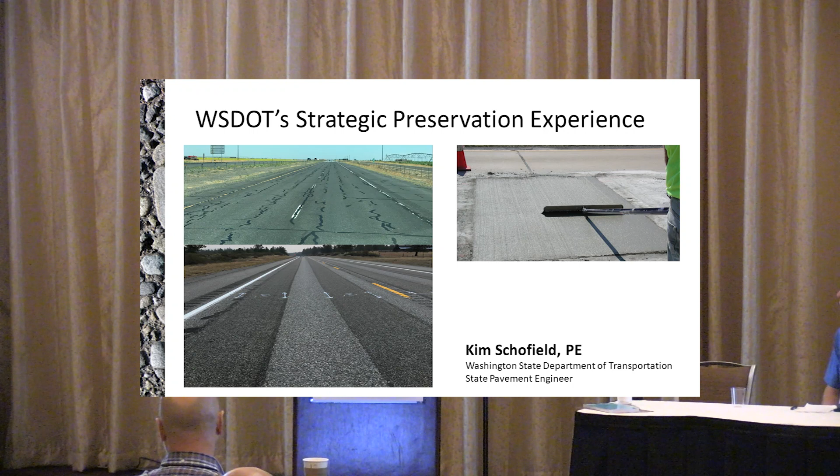Okay, so my presentation's a little bit different than other people's. So I figured, you know, you guys have heard how many lane miles we have and all this kind of stuff. And the theme of the conference is celebrating successes. And one of our biggest successes is that we actually got preservation funding. So I'm going to talk a little bit about how we got there, and it took a long time.

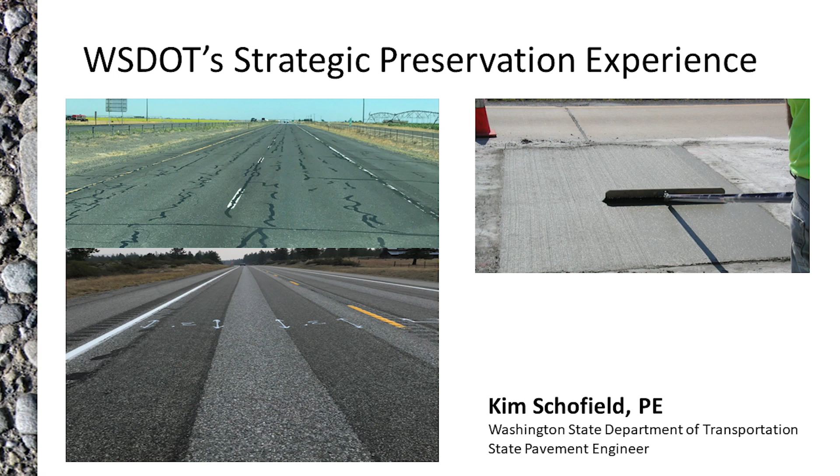So some of our strategic preservation that we do is a lot of chip seal wheel path, crack sealing, patching, on the concrete side, panel replacements, spall repairs, all that kind of stuff. And we started our strategic preservation program back in 2012 because we didn't have enough money. So we've been funded at about 50% funding in Washington for many, many years, and we've really, really struggled with that. So that's why we brought our strategic preservation program in.

When we started back in 2012, we instituted what we called a one-touch policy, which became a two-touch, which became a three-touch and a four-touch because we still didn't have the money. But basically, it was a response to a fiscally constrained capital paving budget. We could not maintain all of our lane miles, so we said, what are we going to do instead? Let's go patch it, and hopefully we can hold everything together. It worked really, really well.

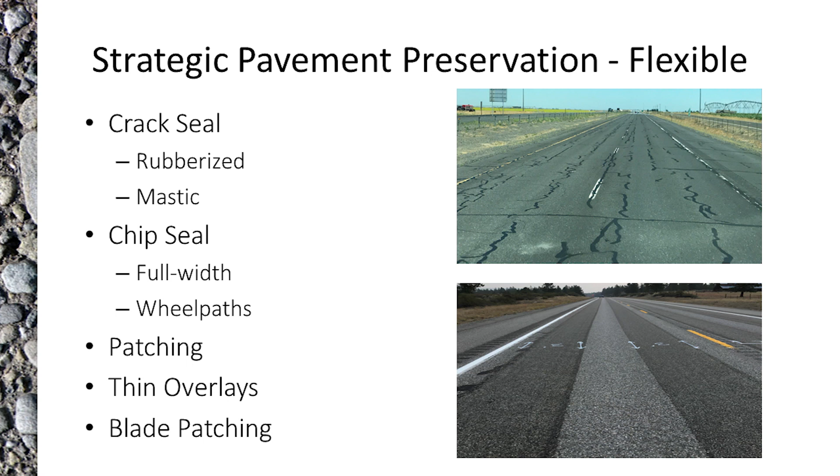Try to stay away from blade patching, but we know that that still happens, especially on our maintenance side. We do some thin overlays, an inch or so, maybe 3/4 of an inch, but most of our stuff is mill and fill, which we call a preservation treatment or a rehab instead of strategic preservation. And then patching like in a wheel path or for a pothole or different things like that.

We see in Washington a ton of top-down cracking. So you look at that pavement and you think, oh my gosh, that pavement is failing. We've got some serious problems, but no.

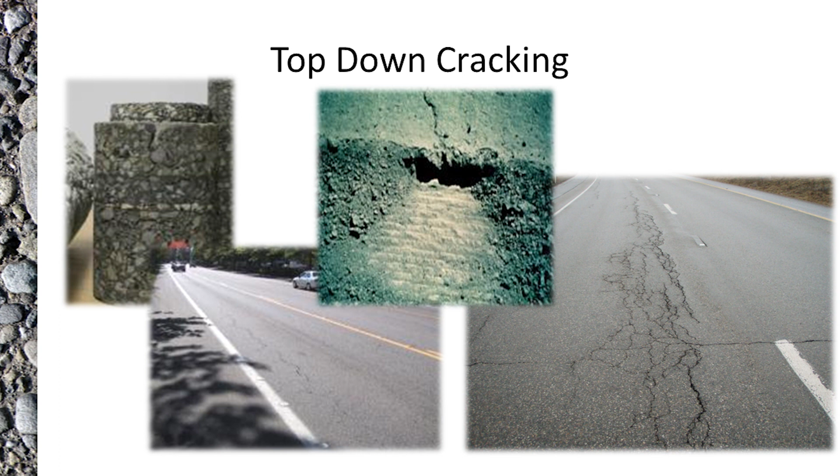It's just the top 2 inches, and if we can catch it in time, all we have to do is remove the top 2 inches, replace that, and the rest of the structure is just fine. Top-down cracking typically occurs when you've got at least 6 inches of hot mix as your structure. What we see is it drives the distresses to the top, and all you have to do is a simple mill and fill and get rid of that.

So we're fortunate for the people that came way before me, and they thought to design most of our pavements fairly thick. We have a lot of our pavements that exhibit top-down cracking, and it's absolutely been a godsend for us to be able to try to keep on top of that.

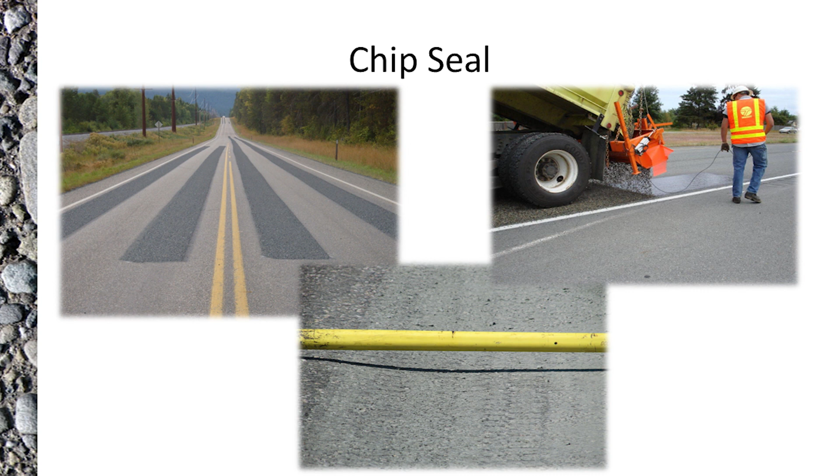Like I said, we do a lot of chip seals, wheel path chip seals just like this. The bottom picture shows you what the rutting on this project was, so fairly significant rutting, and we were able to fill it with a chip seal just in the wheel paths, and it's something that basically lasts until we can do a chip seal on that route. And it fills the ruts, so we don't have to pre-level or mill or anything like that. So it's been a godsend for us as well.

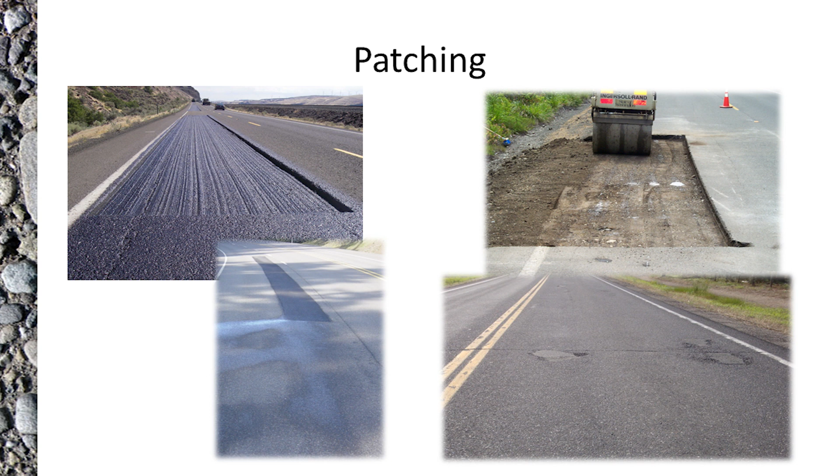Like I said, we do patching. It could be all the way down to base course, or it could just be a mill and fill for those top 2 inches if we have some severe looking alligator cracking, but it's really just that top-down cracking. We've done anywhere from 1.5 feet wide, which I wouldn't recommend for compaction purposes, to a full lane width wide, or just the wheel paths. We typically recommend about 3 or 4 feet wide so that you can get decent compaction. That's probably your best bet.

On the rigid side, we do panel replacements. We actually started a program back in about 2010 where we did what we called triage on our concrete pavements, which was a combination of spall repair, panel replacements, and then a diamond grind, or dowel bar retrofit, panel replacements, and a diamond grind, just to hold those pavements together because they're so expensive to reconstruct. It has, again, saved us like crazy.

We do a ton of panel replacements still. Our biggest problem is spall repairs and making sure that they stay in place. So we've gone away from cementitious products and towards the epoxy products to get our spall repairs to work. We have done some slab jacking, and of course we do grinding as well.

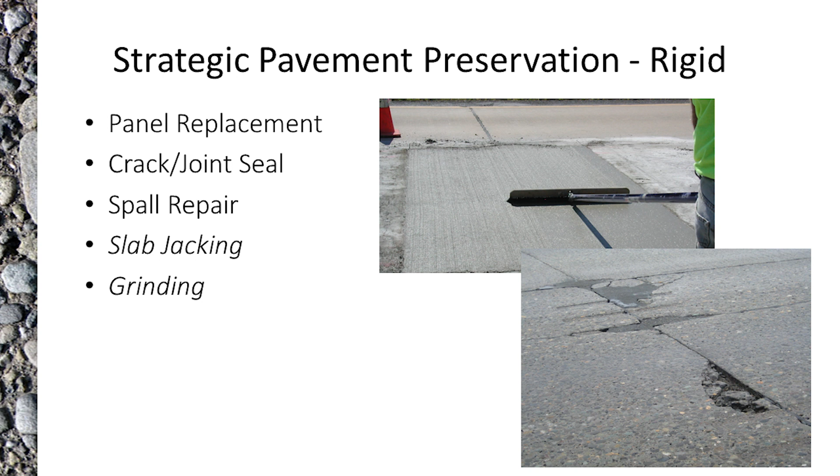One of the things that we always get asked is, how do you make this all work? And it really comes down to communication. We've got multiple different offices all across the state that we work with, all of our region materials engineers. We have 6 regions within the state. We have, of course, the pavement office and the pavement management engineer with the pavement management system. Everybody has access to that, but we've got to make sure that we're getting the right information out to them, choosing the right projects at the right time so that we're doing the right things.

We've also got the money people and program management that we have to deal with. And then, of course, coordinating with maintenance to make sure that maintenance is doing the strategic preservation, or we're contracting that out. We do a combination of that. But communication is absolutely key. We've got to have that communication to make this work. If you don't, you have things like what John was talking about, where you had some significant patching and then you go and mill it out 2 years later, and you just wasted a lot of money with that. And we've had that too, so you're not the only one, John.

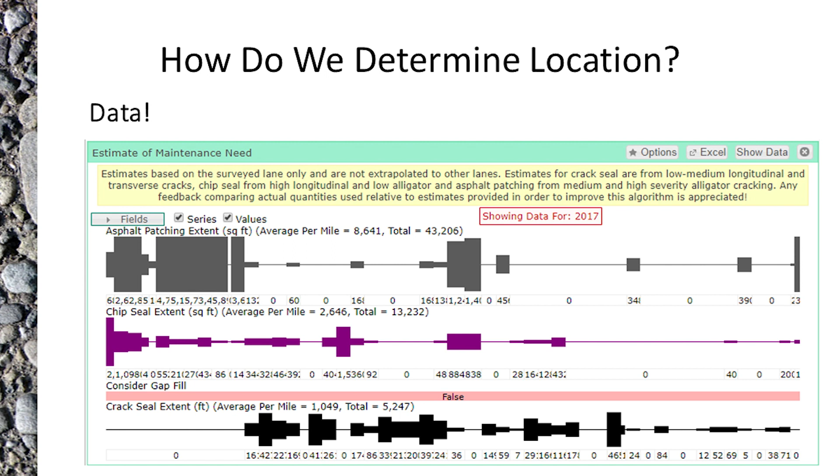In terms of locating where this needs to go, obviously we work with maintenance. They see those roads all the time, but we actually do have something in our pavement management system that, when we rate the pavements, can show where we think that we need patching based on, if you read all the details above, medium longitudinal cracking, alligator cracking at some certain percentage, those different types of things. We actually can calculate what we think we need as patching versus chip sealing versus crack sealing. So we have that as well in our pavement management system that can lead our regions to making sure that we're doing the right thing at the right time.

And then the other thing that we do is we have what's called HATS, but it's our maintenance management system, basically. They track all the work that they do on the maintenance side, and that gets uploaded into our pavement management system as well, so that they know where that work is done and what was done. We try to keep track of that, especially when we were doing the 2 and 3 and 4 touches, making sure that we were taking care of that entire project so that we could limp it along until a capital project came along.

So John talked a little bit about costs, but basically there's a report out there. The link is at the bottom, but there's some pretty good information. That report was written a few years ago now, but we did look at costs, and basically crack sealing, as expected, is one of the cheapest things that you can do. We were able to get 3 to 4 years on average, but we definitely saw more than 5 years life extension just with crack sealing.

So, I mean, it works. It stays in place. We do not route our cracks, and it works just fine. I know that some people say that you've got to route them, but we've not really had any problems with not routing them. Our biggest problem is if we don't clean them right. Some costs for the chip seal stuff, blade patching, and then of course patching like a dig out is probably our most expensive, because most of those dig outs are usually 2 inches or more deep, depending on the region.

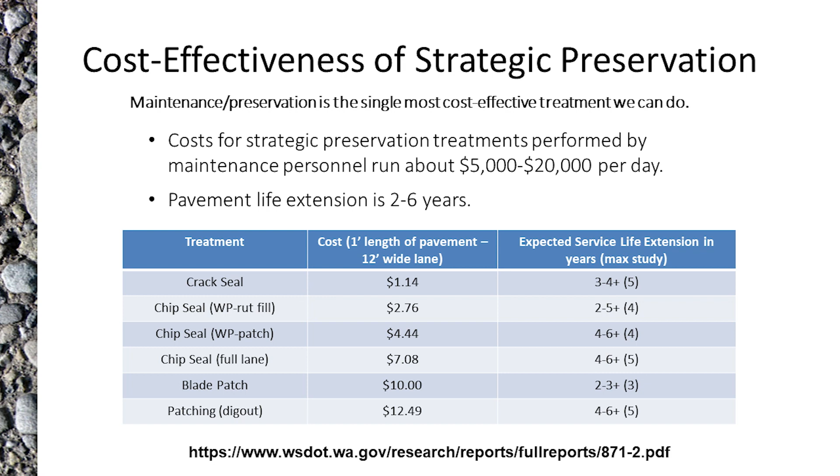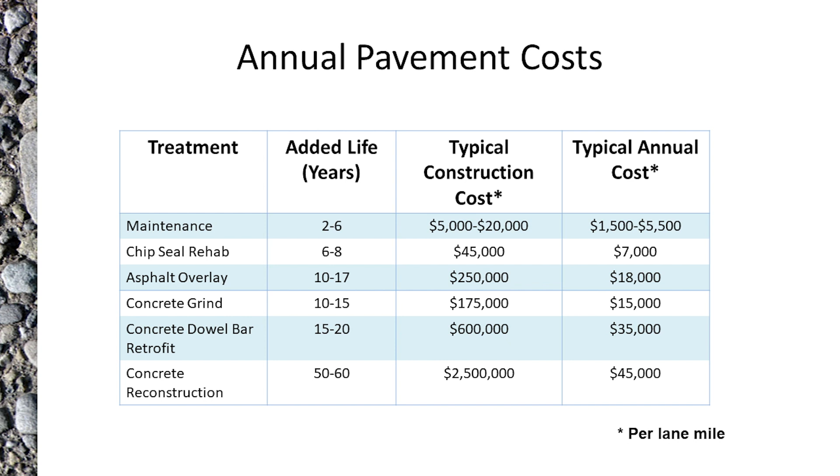Everybody has seen this before, but basically what I'm saying here is even though our maintenance costs are increasing because we have pavements that are in worse and worse condition, it's still cheaper than any kind of rehab that we can do typically. Our chip seal rehabs, that number actually needs to be increased a little bit. We're seeing about $50,000 to $70,000 per lane mile for a typical chip seal. And our maintenance costs have gone up, so all of those have gone up. But still, you can't beat doing strategic preservation if you've got to hold that pavement together.

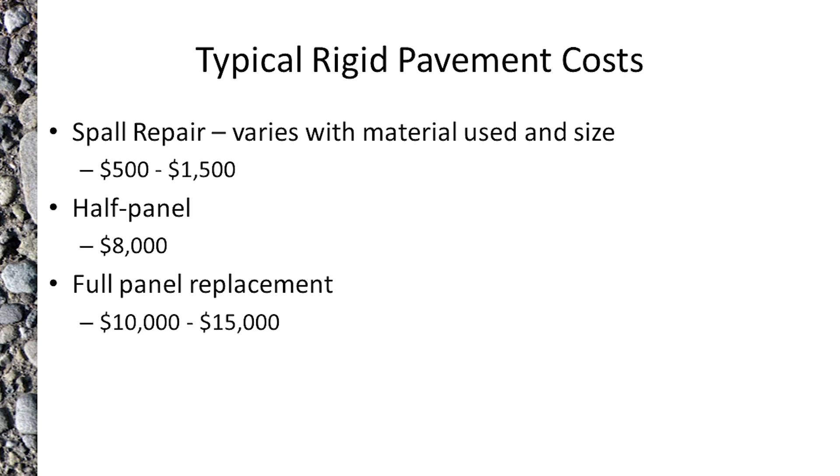Some of our typical rigid pavement costs, because that wasn't included in that report: spall repairs are costing us anywhere from $500 to $1,500. Half panel replacement is about $8,000, and then a full panel replacement is anywhere from $10,000 to $15,000 typically for us. So it's still well worth it to replace one panel that's, say, shattered and causing some ride issues and other issues than to worry about doing a full rehabilitation project or anything like that.

So one thing that I said we started back in 2012, and it was a little bit before that because we had a couple of regions on board. Back in the 2009-2011 biennium, we were putting about $2.5 million per biennium towards strategic preservation. This biennium, we're spending approximately $30 million doing strategic preservation. And we have no reason to stop doing that strategic preservation, even though we're 100% funded. This is still a great life extension. It's still well worth doing it.

Even though we're spending a lot of money doing it, it's still well worth putting that money to it, extending that pavement life anywhere from 3 to 5 or more years, and then being able to do our rehabilitation afterwards. So even though we're at 100% preservation funding, we have no intention of stopping the strategic preservation program. Like I said, we were fortunate enough to get up to 100% preservation funding. This last biennium, we were about $250 million. This biennium, we're up to about $422 million, and then we'll be up to a little over $500 million, and then almost $600 million the next biennium.

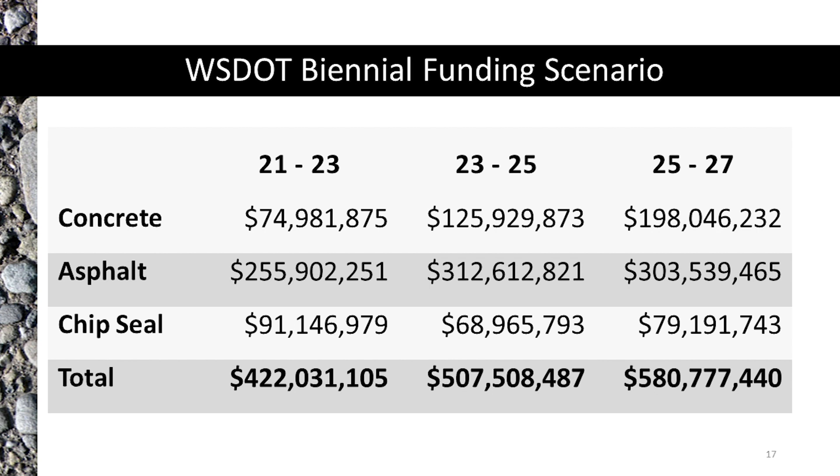So the Move Ahead Washington package that I talked about yesterday, along with IIJA, basically gave us money over 10 years. Usually our legislature is pretty darn controlling about how that money gets put out. They did not tell us when we had to spend that money over the 10 years. So as an agency, we decided to front load that with the promise that the legislature will continue to fund preservation. We've actually front loaded that over the next 4 to 6 years, hoping that we can do that work that we need to do. That will be the challenge, actually delivering. But that's our hope, that we're gonna front load that, be at 100% funding, and try to deliver that preservation program for not just pavements, but all of our assets. So that'll be our struggle, big time.

Like I said, a little bit of a different presentation, but I really wanted to focus on the strategic preservation part. It works. It's very cost effective. Like I said, we don't have any intention of going away from it, even though we're at 100% preservation funding. It definitely extends pavement life. We've had very, very few failures when it comes to strategic preservation touch.

If you can do it early, that's the best time to do it, because then you can spend a lot less money and just do a crack seal typically, or a small patch, and not have that pothole grow or anything like that. And the other thing is tell your story.

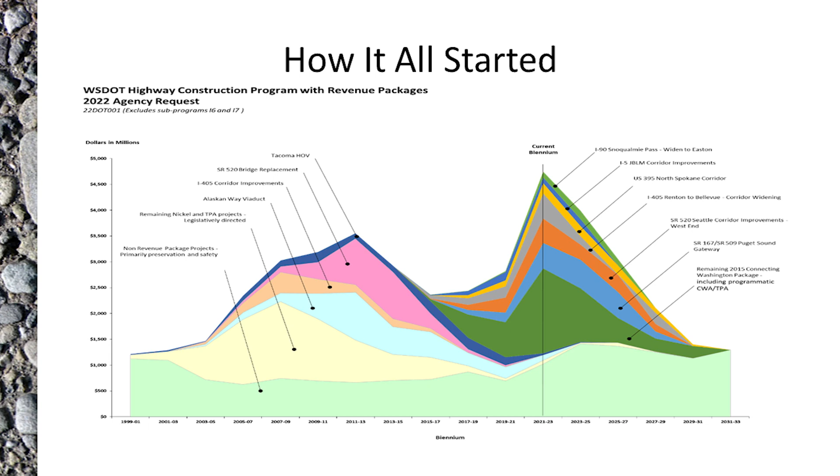In terms of changing their attitude for the fully funded, how much of the discussion did it finally sink in that good roads are cheaper? Honestly, I have no idea what made them change their mind. Maybe they got tired of us complaining. I don't know. I honestly don't know what made them change their mind, but I do know that we've been telling the same sob story for over a decade, and we finally did get a fairly large package to fund specifically preservation.

So I used to live in Washington, so I'm kind of familiar with the weather, and I know that it rains all day, every day, like almost all year. On the west side. On the west side. So I was always curious, how do you schedule your projects, like for preservation and maintenance? Do you just have a really narrow window, or you just have to pray it's not going to rain today?

So that's the misconception, and that's just to keep people away from Washington, honestly. It doesn't actually rain every day, all day. We actually have a pretty darn good summer on the west side. We can pave anywhere from March through October, honestly. We're still paving right now. We've got basically the same weather as what we have right here in New Mexico right now, which is alarming, but for other reasons. So we actually do have a fairly good paving window, but we definitely are not like Texas and Arizona where they have all year round.